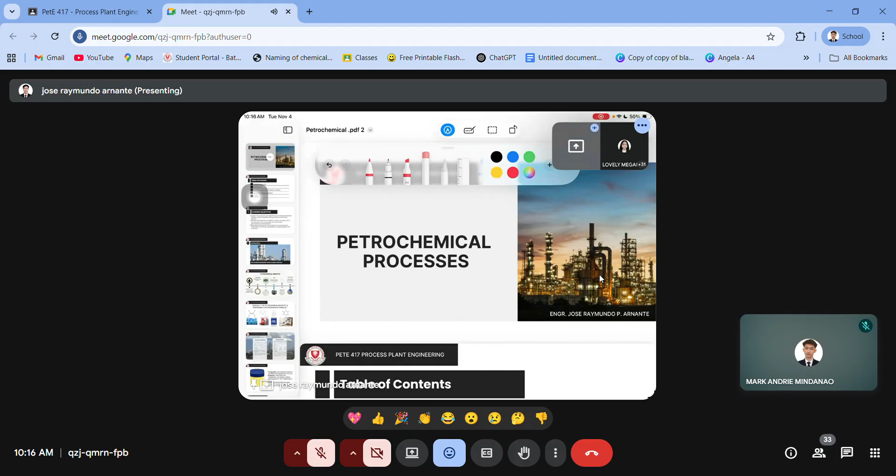Para 'pag nag-discuss ako ng process ng product manufacturing, makaka-follow kayo ng maayos-ayos. So, petrochemical. So, learning objectives for this 1 hour and 30 minutes lecture was, i-explain natin ang significance ng petrochemical industry. And then identify the key feedstocks. Most usually sisimula tayo sa naphtha, then the ethane, propane.

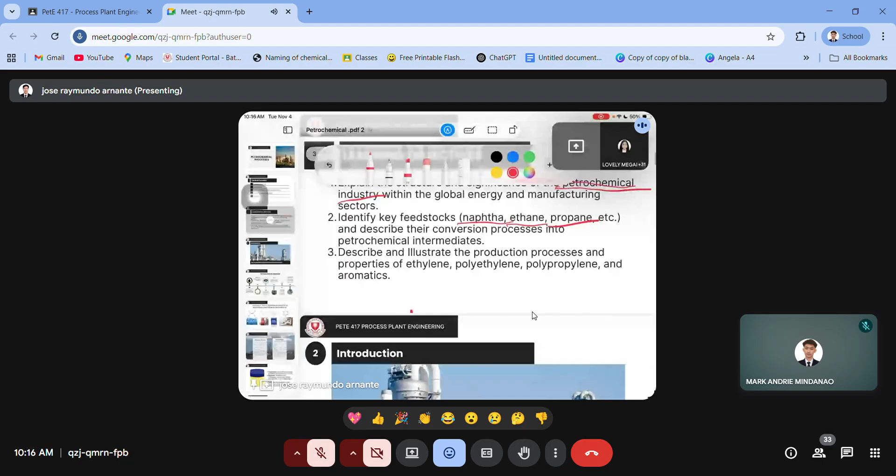Tapos illustrate the production process, properties of ethylene, polyethylene, polypropylene, and the aromatics. Okay, so familiar naman kayo sa mga word na yan. Yung mga CH4, C2H4, mga C3H6, mga aromatics, yung mga may mga benzene ring.

Okay, so introduction. So petrochemical is the fundamental pillar of the modern industry. Right after na produce ang ating crude oil, they are refined. Marami yan byproducts. We have the kerosene, jet fuel, gasoline. Isa na doon ang naphtha. Okay? Naphtha.

Naphtha. So magkaiba ang naphtha sa naphthalene, ha. Naphtha is just a broad term, parang jet fuel, gasoline, kerosene. Marami pa 'to, pwede pa siyang ma-reform, pwede pa siyang further distilled or crack, ang tamang term ay crack, into smaller hydrocarbons. Which is ginagawa sa isang petrochemical plant.

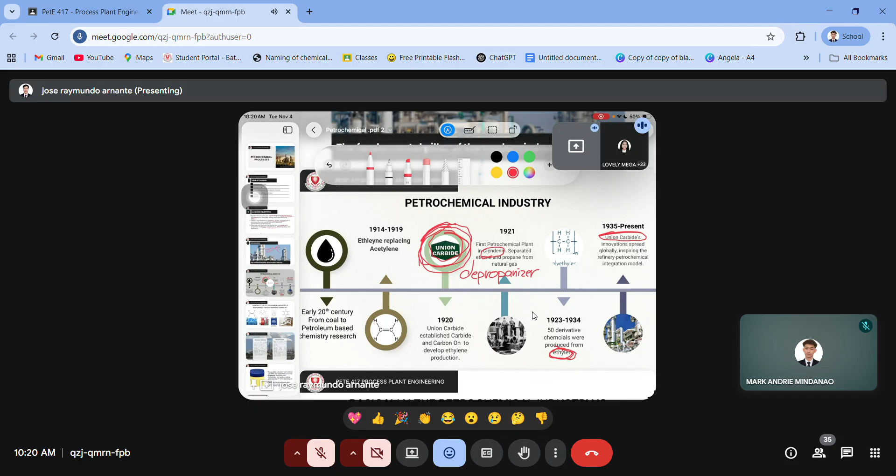So magkakaiba ang petroleum refinery and petrochemical. So petroleum refinery, crude oil mismo nandun, yung freshly produced crude oil. They're turned into fuels, energy, gasoline, diesel, jet fuel, LPG. They also produce lubricants, asphalt. Yung asphalt yung nasa pinaka-heavy, nasa pinakababa ng distillation column. And other refined petroleum products for transportation, power generation, and industrial use.

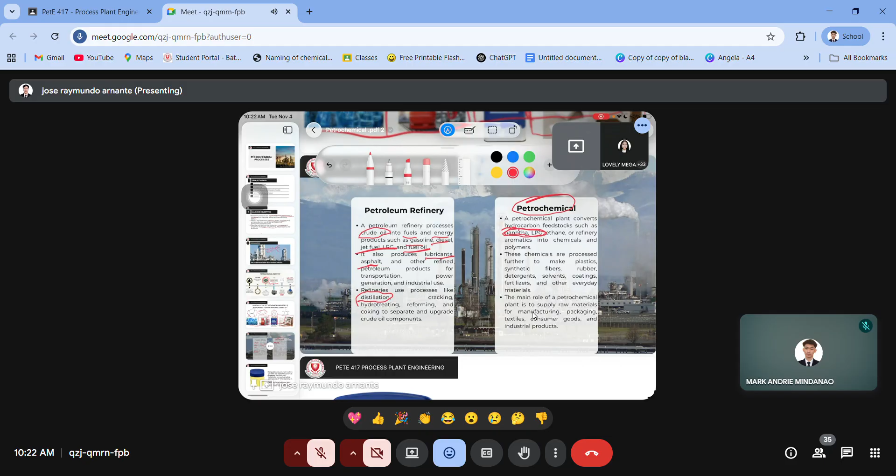So refineries use processes like distillation, cracking, hydrotreating, reforming, and coking to separate and upgrade crude oil components. Sa petrochemical naman, converts hydrocarbon feedstocks. Ang feedstock niyan ay naphtha and LPG. These chemicals are processed further to make plastics, synthetic fibers, rubber, detergent, solvents, coating, fertilizers, and other everyday materials.

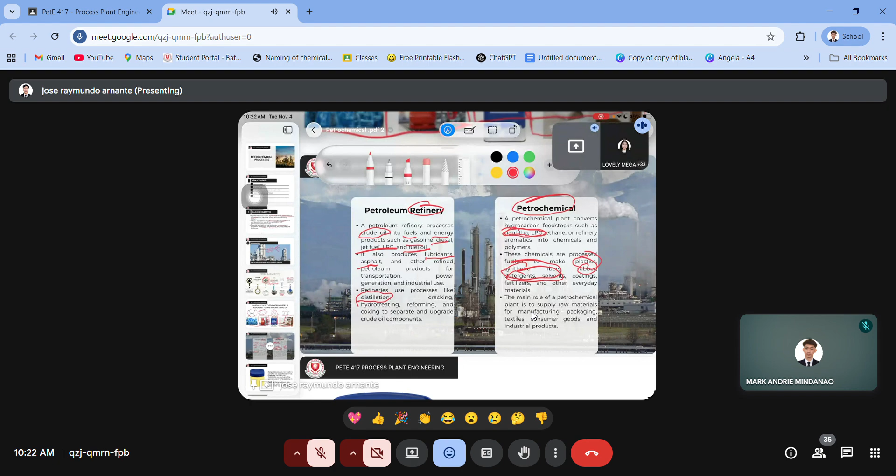So the main role of a petrochemical plant is to supply raw materials for manufacturing, packaging, textiles, consumer goods and industrial products. Actually parang parehas lang ang refinery at petrochemical, iba lang yung kanilang feedstock. Pag sa refinery crude oil, pag sa petrochemical either naphtha or LPG. So ito, I think this is very familiar to you. Ano kaya itong product na ito?

Tingnan itong product na to, Miko. Oh, Isagani. Petroleum jelly po, sir. Ayan. This is a petroleum jelly. Okay? Pretty sure you've heard of this product. Okay? So, petroleum engineer ka?

Yes, I'm a petroleum engineer. So, gumagawa ka ng petroleum jelly. So, minsan, tinatawanan lang natin yun, di ba? Pero, sabihin mo, yes, we are also responsible of creating that product. Okay? Pero, sabihin mo, through our petrochemical plants.

So, sa composition of that, it is a saturated hydrocarbon. Ibig sabihin ng saturated ay, ayan, paraffins and isoparaffins. Carbon 15 to carbon 30, it is chemically inert. Ibig sabihin, non-reactive siya tulad ng nitrogen. So, kapag nilalagay natin sa skin, di ba? Wala kang mararamdaman kasi hindi siya nagre-react.

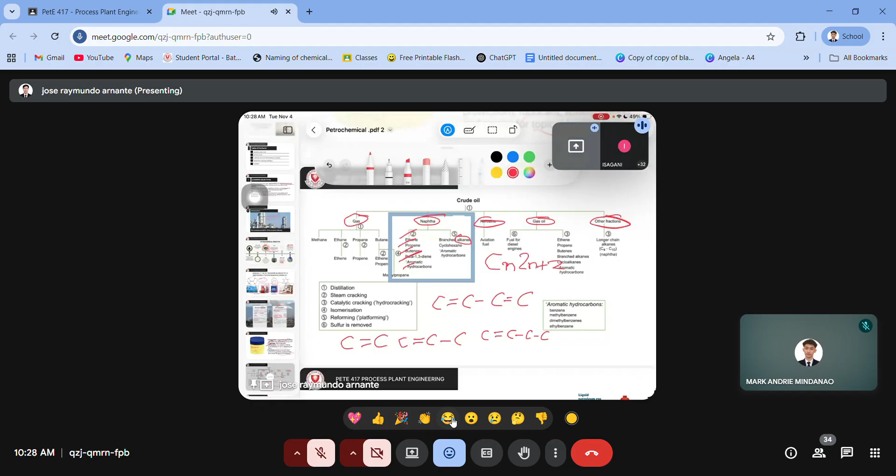So what is a naphtha? Okay? Wrong spelling lang. So naphtha is an intermediate hydrocarbon liquid stream derived from refining of crude oil with CAS number 64742-48. So yun yung parang unique product number. It is most usually desulfurized, ibig sabihin walang H2S. Okay? Walang sulfur, walang H2S.

It is typically catalytically reformed. So ano yung reform? Reforming arranges or restructures the hydrocarbon molecules in naphtha as well as breaking some of the molecules into smaller molecules to produce high-octane component. Okay? High-octane component of gasoline or petrol.

So, yung mga nagpapagas dito sa mga gasoline station, di ba meron kayong makikita mga 93 plus, 89 plus. So, yung mga ganon ay dapat yung makina nyo ay akma kung ano yung kanyang octane. Kasi the higher the octane rating, mas mahirap siyang i-combust.

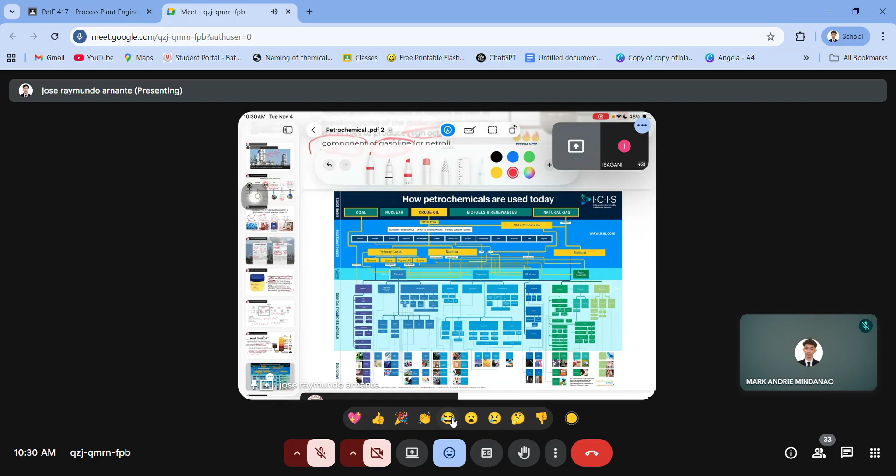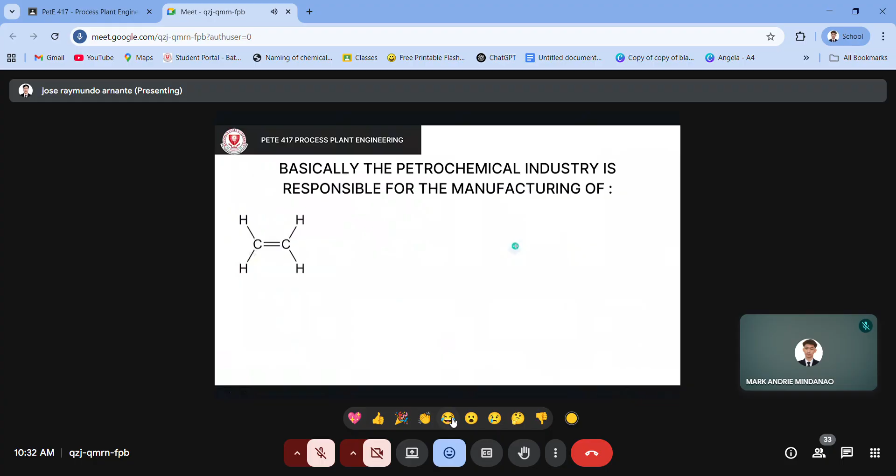Ito, naphtha. Okay? So, with this napakalaking diagram na basang-basa nyo, sandali. So, pag zinoom ko siya, nakikita nyo, malinaw kaya? Sobrang linaw. Alam ko na. Yung share screen ko, papalitan ko. Yan. Ito, mas smooth siya. Ayan, mas malinaw ito dito. Hindi, medyo malinaw din po siya.

So, we are here sa naphtha tayo. Ang product niya ay ito, naphtha, propylene. So, compare nyo, ang kanyang size, mas malaki siya kaysa doon sa refinery gases and the methane. Okay, so it constitutes about 60% of the products used in petrochemical industry. So, napaka-importante ng naphtha.

Okay, so ang naphtha natin, meron tayong isa sa JG, sa work natin. Dati walang naphtha cracker doon. So sabi ni Gokongwei, para hindi na tayo mahihirapan mag-import ng naphtha, gumawa sila ng naphtha cracker. I think that was around 2005. So may naphtha cracker doon. Ang naphtha cracker, it refines crude oil. I mean, hindi pala.

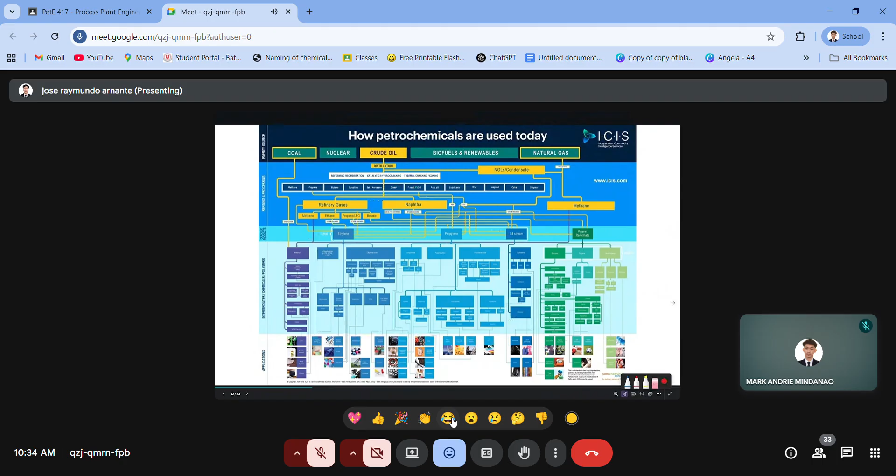So, naphtha is a general term. There are hundreds of different crude oil sources worldwide, and each crude oil has its own unique composition or assay. There are also hundreds of petroleum refineries worldwide, and each of them is designed to process either a specific crude oil or specific types of crude oils.

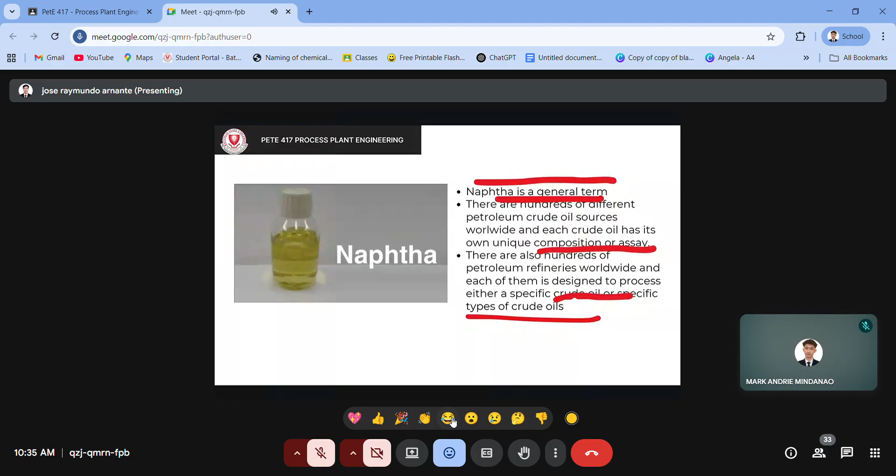So, naphtha properties: it has its own initial boiling point and final boiling point. Initial boiling point actually ranges from around 35. Pag final boiling point naman, 200 yan. The first unit operation in a petroleum refinery is actually the crude oil distillation. Kung nag-produce ng crude oil, produce naphtha.

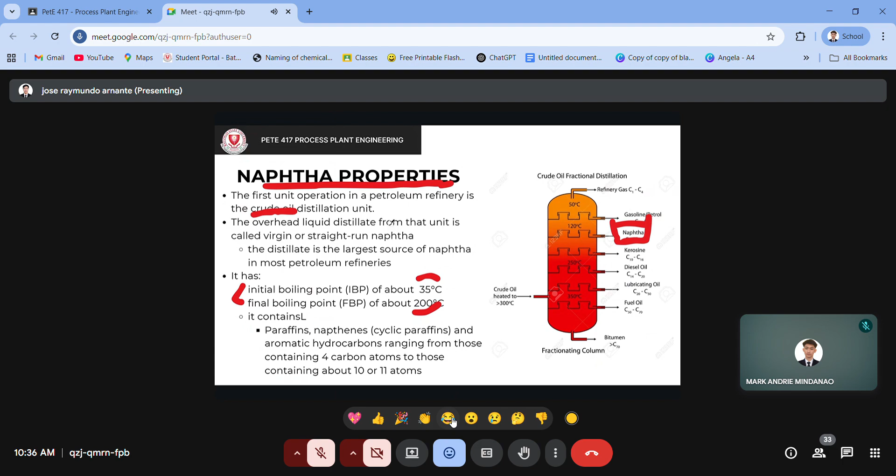So, meron dalawang types ng liquid distillate. Yung una, yung straight run naphtha or the virgin naphtha. So, this is the distillate. This is the largest source of naphtha in most petroleum refineries. So, it has boiling point at 35, tapos yung FBP niya naman ay 200. It contains paraffins, naphthenes, and aromatic hydrocarbons.

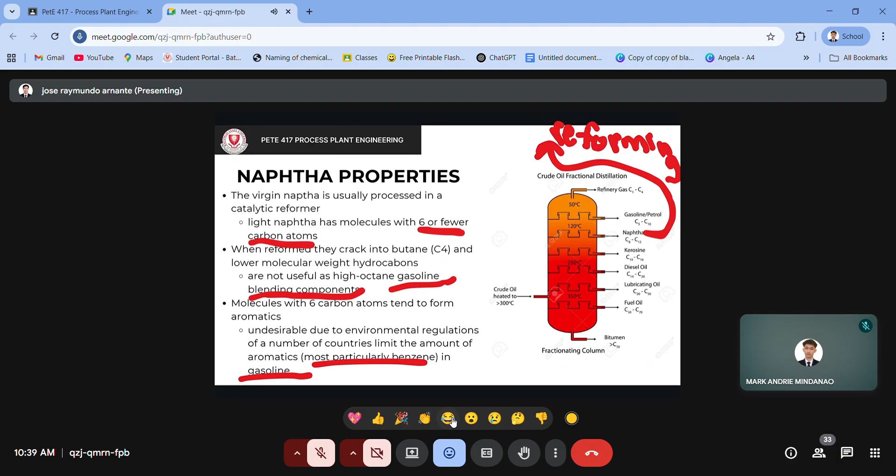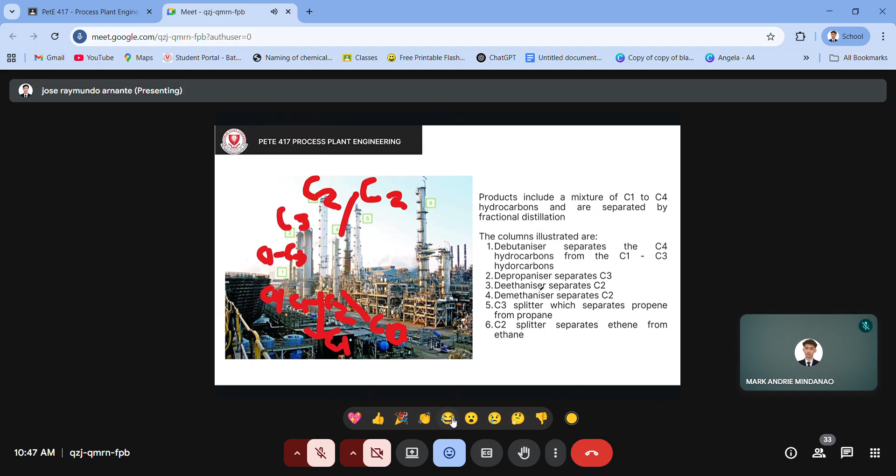So the C3 splitter, number 5, separates propene from propane. Okay, so number 5, propene from propane. So the C2 splitter, number 6, the same as number 5, separates ethene from ethane.

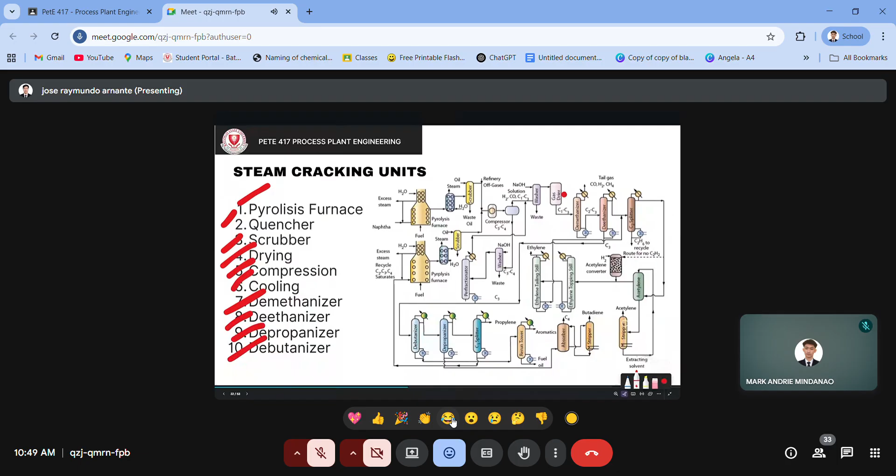The pyrolysis furnace is an industrial heating unit designed to thermally break down organic materials, usually hydrocarbons, in the absence of oxygen. So, the goal is to decompose large molecules into smaller, more valuable ones through pyrolysis, a process typically used in the petrochemical industry.

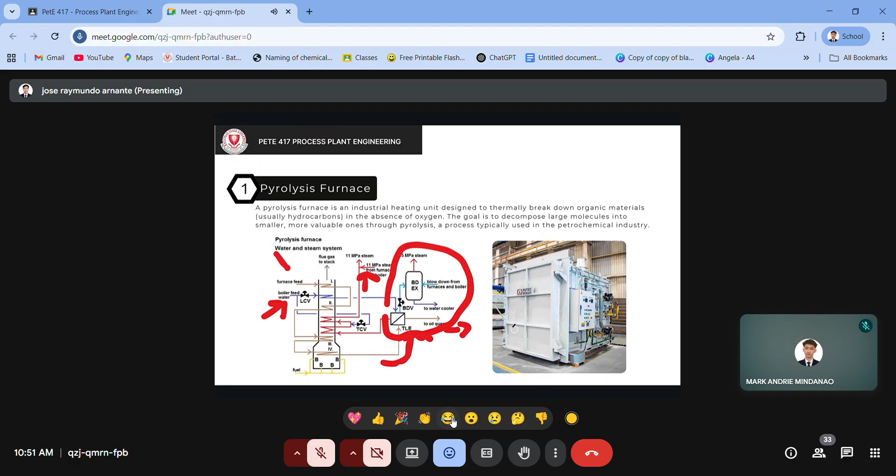Next is we have the quencher. And quencher is used to rapidly cool hot reaction products to stop further chemical reaction. Okay? Balikan natin ito, oil quencher. So when hydrocarbons are cracked in a furnace, the reaction exits extremely hot, around 800 to 900 degrees Celsius, if not cooled immediately.

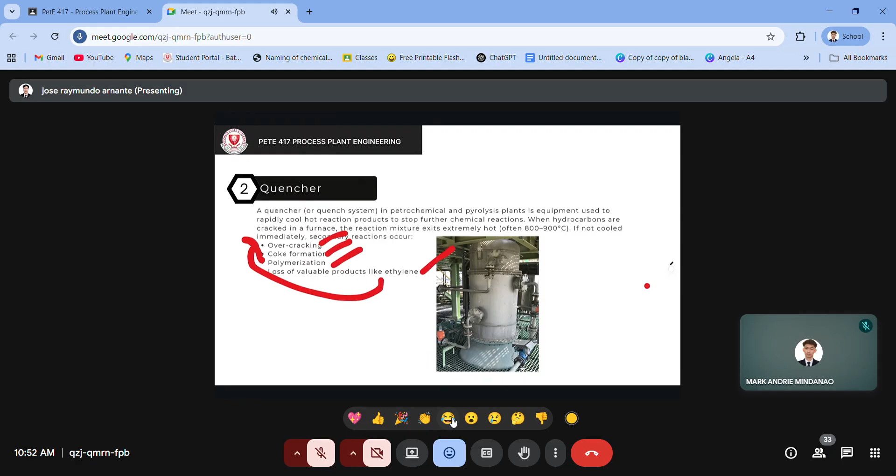So in this picture is actually a coke formation, C-O-K-E. It's a byproduct of a cracking unit. The pressure is very high, and over distance it solidifies, so it becomes solid there. Then its appearance is black, so it's extreme burning.

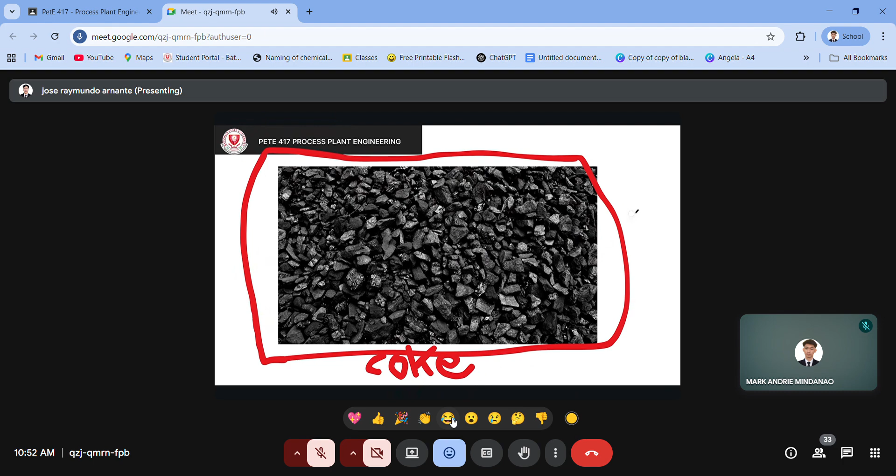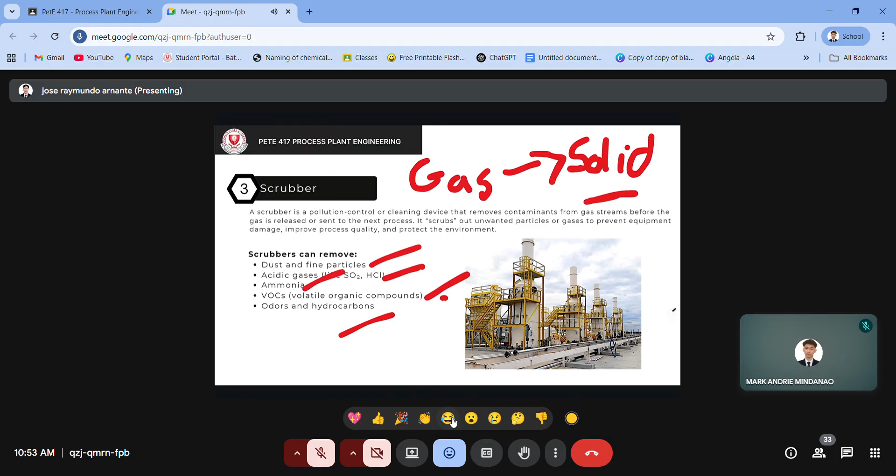So basically this acts like a separator. The gas stream - we remove its solid components. What are these solid components? It can be dust particles, acidic gases, ammonia, volatile organic compounds, and also odors and hydrocarbons. But in this case, usually what's used there is for removing dust and fine particles - so separating gas from solid.

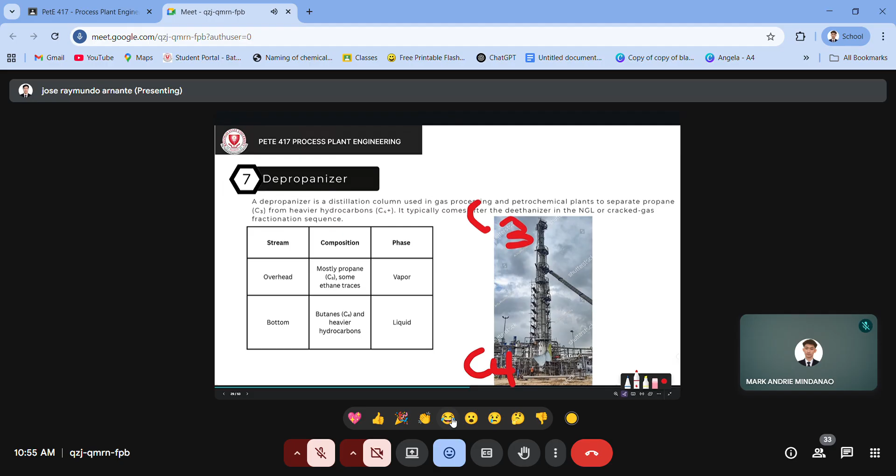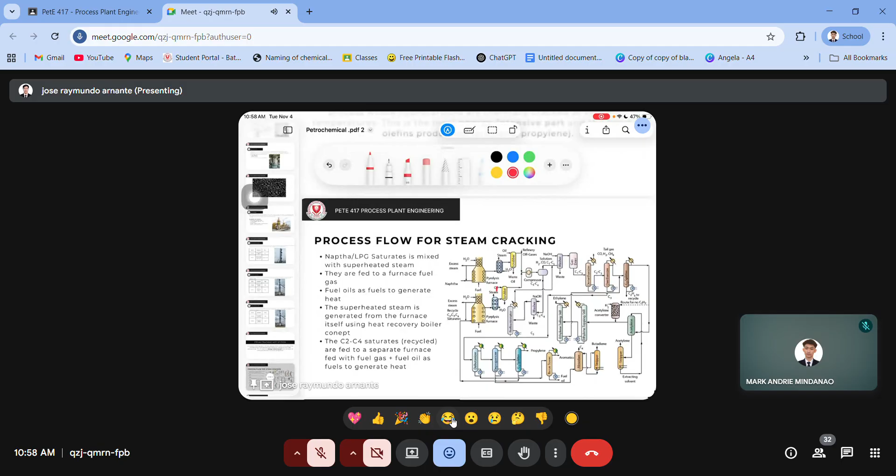Yo, okay. Hello, I think I can be heard now, right? Yes, okay.

So naphtha - let's go. So naphtha or LPG saturates is mixed with superheated steam. So this is our naphtha, and this is also our H2O - that's our steam. So they're fed to furnace fuel gas, and fuel oils are used as fuels to generate heat.

Heat there. Then the superheated steam is generated from the furnace itself using the heat recovery boiler concept. What's that? That's just a concept so that the steam coming out from the furnace can still be used or recovered. I'll discuss that later.

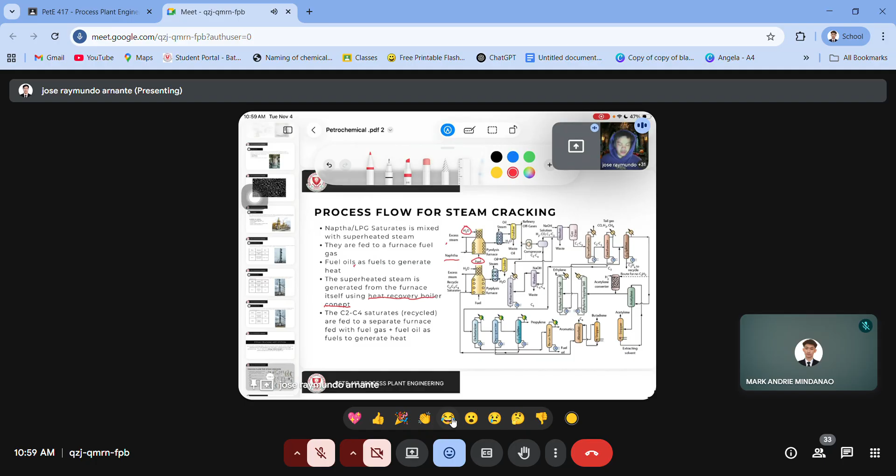So the C2-C4 saturates, or the recycled material, are fed to a separate furnace fed with fuel gas plus fuel oil as fuels to generate heat. So if you can see here in the process, there are two furnaces - we have number 1 and we have, wait, there's none.

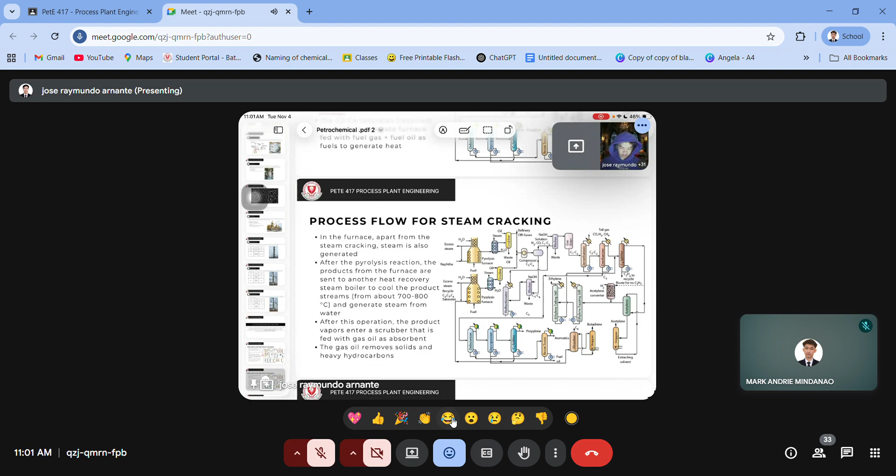So in the furnace, apart from the steam cracking, steam is also generated. That's why - this part that I circled, its contents include, of course, the cracked hydrocarbons and also the superheated steam. So it's a mixture - a mixture of hydrocarbons and steam, plus steam.

So, it's a mixture of hydrocarbons and steam. After the pyrolysis reaction, the products from the furnace are sent to another heat recovery steam boiler to cool the product streams and generate steam from water. Since it enters here, it's hot, around 800 degrees Celsius. That heat, we can use it to produce more steam, because that steam is a utility that can be used anywhere. Since it's hot, it would be a waste of heat if we send it directly to the process, so we can still create steam.

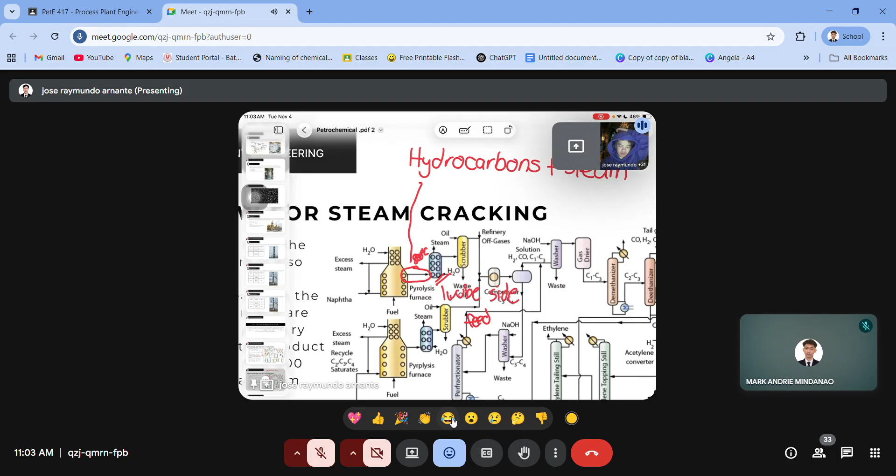This blue part is actually a heat exchanger. The hot stream goes to the tube side, the feed. Then the H2O, the water, goes to the shell side. That H2O can be produced into steam, which can go back here, or be used there, or used in other processes. That's the heat recovery concept I'm talking about.

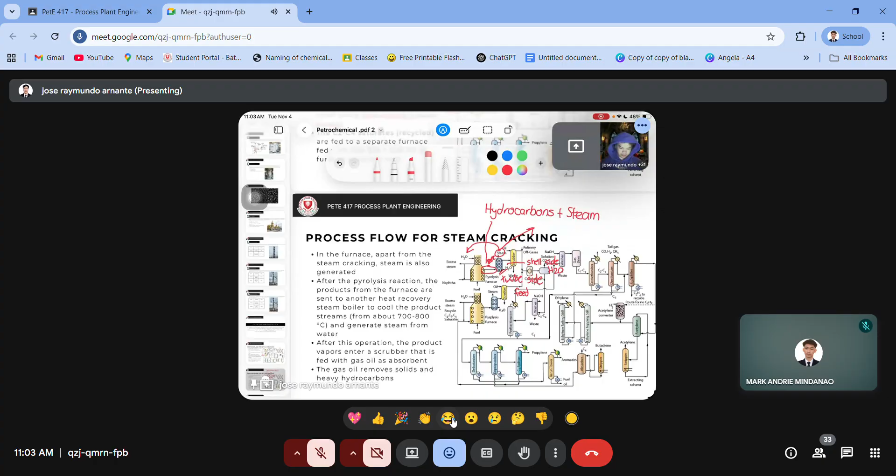After this operation, the product enters a scrubber that is fed with gas oil as absorbent. The gas oil removes solid and heavy hydrocarbons. So it goes to the scrubber. What is this scrubber?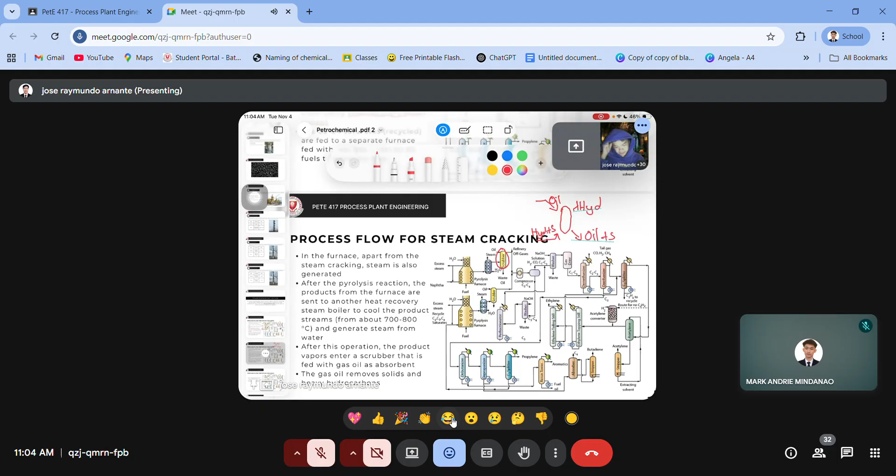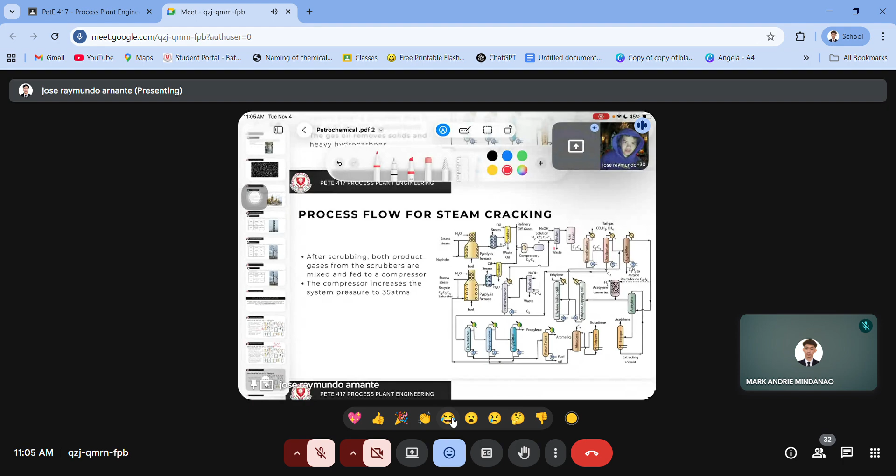Next, after scrubbing, both product gases from the scrubbers are mixed and fed to a compressor. The compressor increases the system pressure to 35 atmosphere. What's the purpose of the compressor? The compressor I discussed before, its purpose is just to deliver gas, but at this point, our compressor has an additional function. From the word itself, compresses, it turns the vapor feed into liquid.

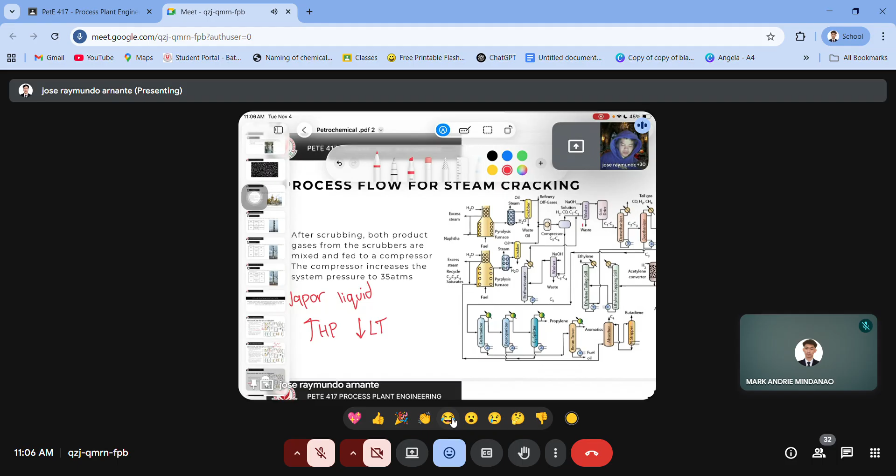So how does that happen? That's only possible when pressure is high, but the temperature is low. At that point, our light components, let's call this the stream, the light ones turn into vapor, while the heavy ones remain as liquid.

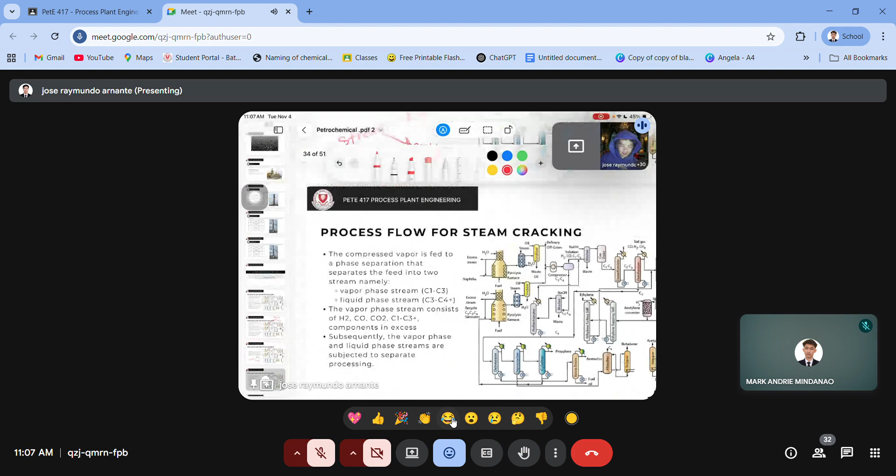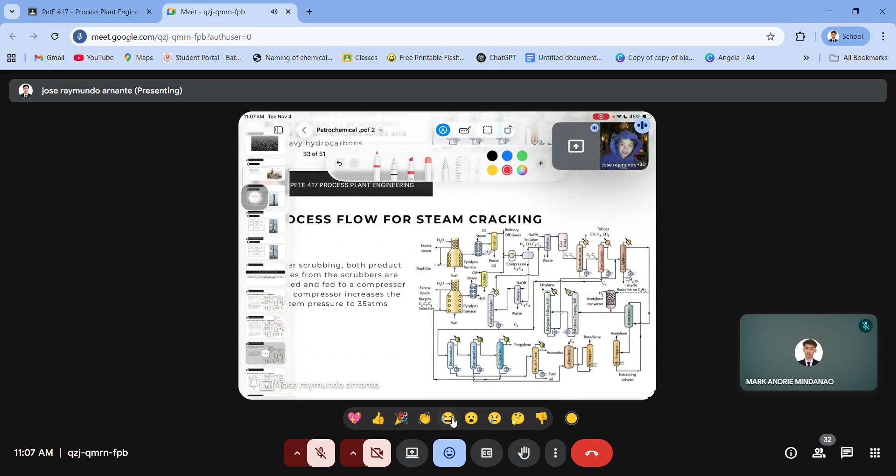At this point, we're here. So the compressed vapor is fed to a phase separation. Since we already compressed it, it's already at high pressure at that point, specifically when it's in the compressor at 35 atmospheric pressure.

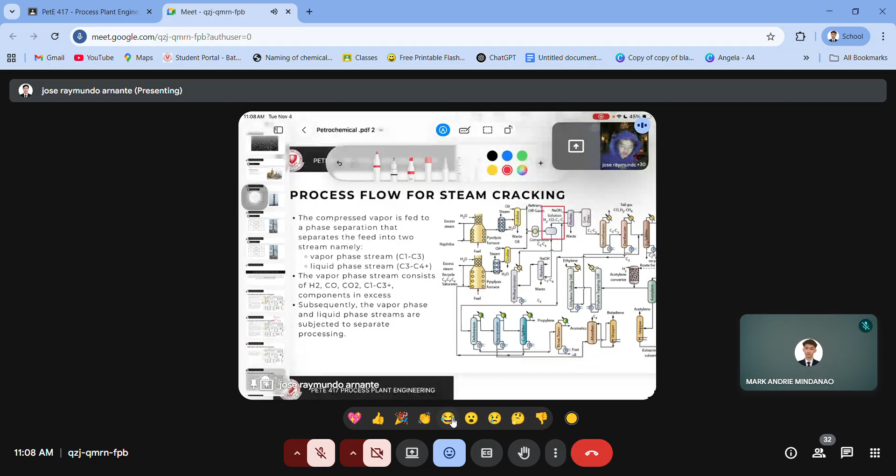So at that point, the compressed vapor is fed to a phase separation. This is it, phase separation. Then they separate the feed into two streams: the vapor phase, which is C1 to C3 plus H2 and carbon monoxide, plus carbon dioxide. The liquid phase, on the other hand, is C3 plus C4. If I zoom in, here it is. This part going down, that's the C3 to C4. Then this part is the H2, CO, C1 to C3, and also carbon dioxide is there.

Now let's go to the cold section. The cold section starts with this gas stream I mentioned. That's our gas stream, and that's where the cold section begins. The cold section handles cooling, compressing, drying, separating, and purifying cracked gas after the hot section. It turns the hot cracked mixture into separate valuable products like ethylene, propylene, hydrogen, and BTX aromatics.

So the gas stream processing starts over here.